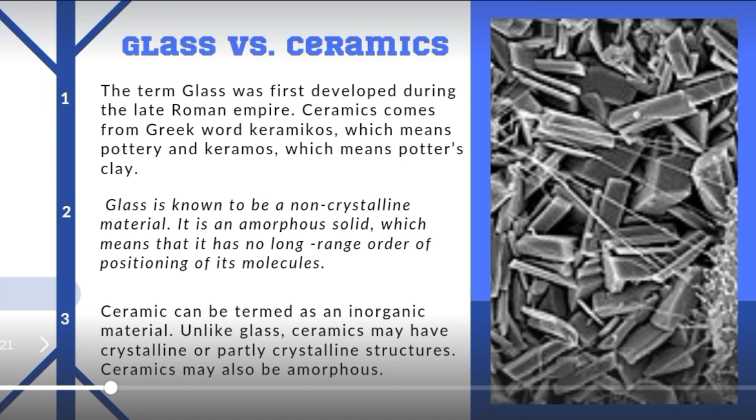Silicon dioxide is the main component of glass. Glass is a mixture of two or more kinds of metallic silicates. Clay is the main component in ceramics. Silicon dioxide, also known as silica.

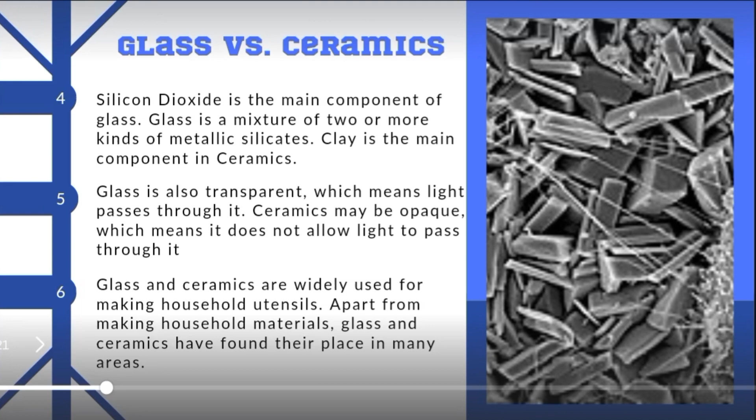How glass is made. So number one, raw materials. The first step in making glass is to gather the raw materials needed to make it. Main raw materials used in making glass are silica sand, soda ash, and limestone. These materials are usually gathered from natural sources such as beaches, quarries, or mines.

Once the raw materials have been gathered, they are typically transported to glass-making facilities where they are mixed together in a specific proportion to create the glass batch. The batch is then melted in a furnace and shaped into the desired form using various techniques such as blowing, molding, or pressing.

Mixing and melting. The raw materials are mixed together and heated in a furnace at very high temperatures, typically around 1700 degrees Celsius. In the mixing and melting stage of glass making, the raw materials are combined and heated in a furnace at extremely high temperature, resulting in a molten glass mixture. This result is created by combining silica sand, soda ash, and limestone. This high heat causes the raw materials to liquefy and fuse together, forming the basis of the glass that will be created.

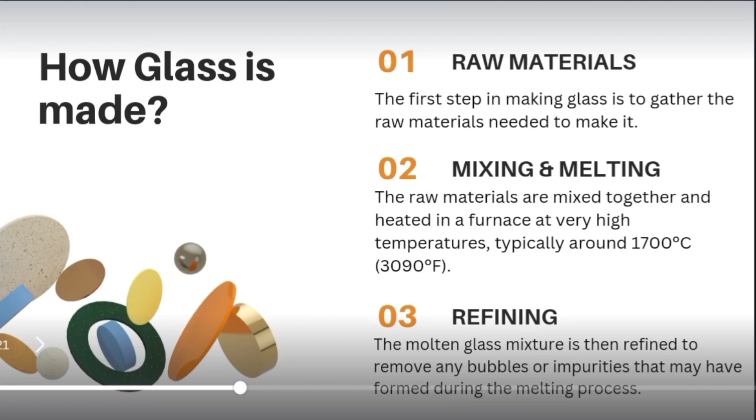The refining process involves stirring the molten glass mixture to break up any bubbles that may have formed, and then skimming off any impurities that rise to the surface. So, it helps to ensure that the final product is clear, uniform, and free of defects. Once the refining process is complete, the molten glass is ready to be formed into the desired shape and product.

How glass is made? Forming. The molten glass is then formed into the desired shape using one of several methods. So, blowing. In blowing, the glass is heated again and air is blown into it through a blowpipe or other tool to create a bubble. The bubble is then shaped and manipulated until it forms the desired shape.

So in pressing, the molten glass is poured into a mold and pressed into shape using a plunger. In casting, the molten glass is poured into a mold and left to cool and solidify into the desired shape. After forming, the glass product may go through additional processes such as annealing, cutting, and polishing to achieve the final product. So, annealing, once the glass has been formed, it is slowly cooled in a process called annealing.

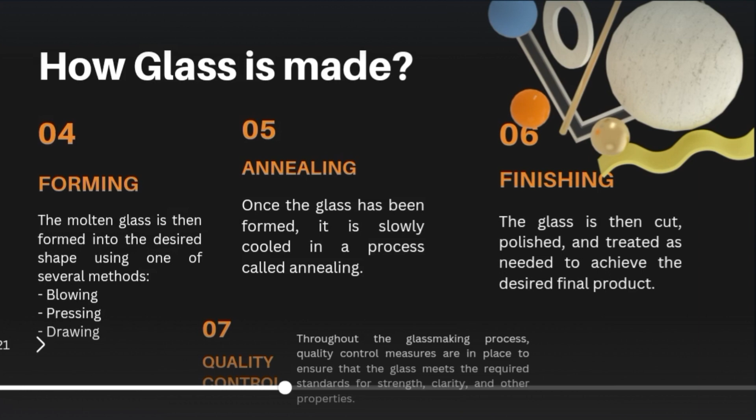So, quality control throughout the glass making process. Quality control measures are in place to ensure that the glass meets the required standard for strength, clarity, and other properties. Overall, the process of making glass is complex and requires skilled technicians, and advanced equipment to produce high quality glass products.

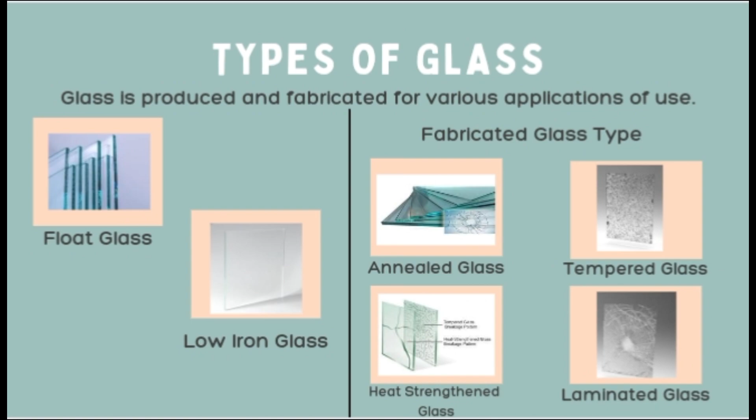Common ingredients to obtain glass. Sand. Sand, also known as silica or silicon dioxide, is one of the main ingredients used in making glass. To make glass, silica sand is mixed with other materials such as limestone, soda ash, and feldspar, which help to lower the melting point of the silica.

The mixture is then heated at high temperature in a furnace until it melts into a liquid state. The molten glass is then poured into a mold, where it is allowed to cool and solidify into the desired shape. The quality of the sand used in making glass is important, as impurities such as iron oxide can give the glass a greenish tint. To ensure high quality glass, the sand is often washed and purified before use.

Additionally, recycled glass, known as cullet, can also be added to the mixture to reduce the amount of virgin sand needed, making the glassmaking process more sustainable.

Next ingredient is soda ash. Soda ash, also known as sodium carbonate, is another important ingredient in the manufacturing of glass. It is usually added to the mixture of sand and other ingredients to lower the melting point of the silica and improve the flow of molten glass. Soda ash is obtained from naturally occurring deposits or can be produced synthetically by reacting sodium chloride, or salt, with limestone and carbon dioxide.

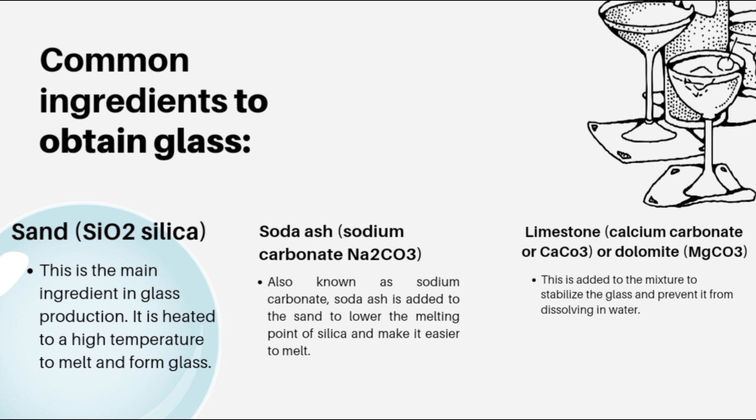The use of limestone also improves the chemical durability and strength of the glass. In addition to its use in the glass industry, limestone has a wide range of applications such as in construction, agriculture, and chemical industries. Main properties of glass.

First, transparency. Glass is transparent, which means that it allows light to pass through it, making it useful in applications such as windows, lenses, and optical fibers. One of the fundamental characteristics of glass is transparency. It refers to glass's capacity to let light through and allow objects to be seen through it, given that it allows a large portion of visible light to flow through it without noticeably distorting or being significantly absorbed.

Second is hardness. Glass hardness is yet another crucial characteristic. It speaks to glass's resilience to abrasions or scratches. Glass is a tough substance that is challenging to scratch or harm. Glass's chemical makeup and how it is handled during the manufacturing process affect how hard it is. Glass is a strong substance that can survive wear and tear over time due to its hardness.

Glass can still be scratched or damaged by hard or sharp items. Despite the fact that it's a durable material, glass can be given specialized coatings or laminates to boost its durability and hardness, which will help avoid scratches and damage.

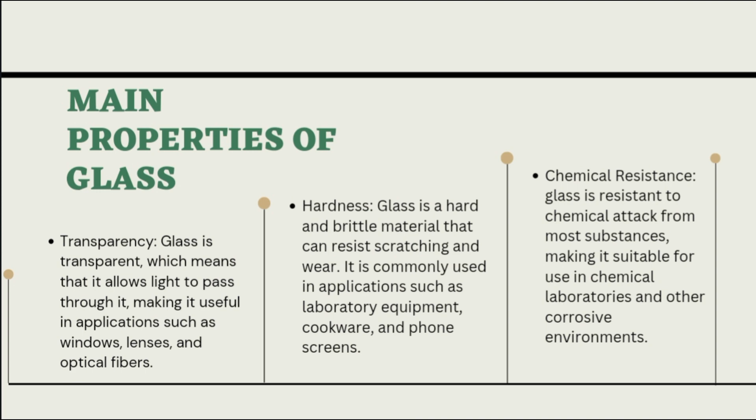Next is chemical resistance. Another crucial characteristic of glass is its capacity to withstand chemical attack from a variety of chemicals. Glass has a high degree of inertness, making it resistant to most chemical reactions. Strong chemical bonds between the atoms in the glass structure are responsible for this. It suits applications like laboratory glassware, chemical storage containers, and medical equipment.

Next is thermal resistance. Another crucial characteristic of glass is its resilience to heat. It describes glass's capacity to tolerate extreme temperatures without breaking, melting, or going through any other kind of physical or chemical change.

Next is durability. Glass durability is yet another crucial quality. Glass is a tough substance that can resist a lot of abuse. Due to its resistance to impact, abrasion, and scratching, it is perfect for usage in a wide range of industries, including consumer goods and building construction. Glass is durable because of its chemical resistance and toughness.

Next, and last, is electrical insulation. The electrical insulation of glass is the next significant characteristic. Glass is a superb electrical insulator, meaning that electricity does not conduct through it easily. Glass is the perfect material for electrical devices like insulators, capacitors, and transformers.

Because of its characteristic, glass has a high electrical resistance which prevents current from passing through it and lowers the risk of electrical shock while safeguarding the equipment.

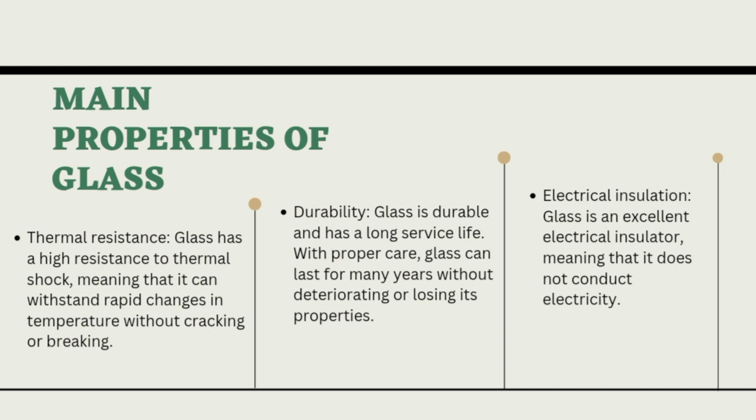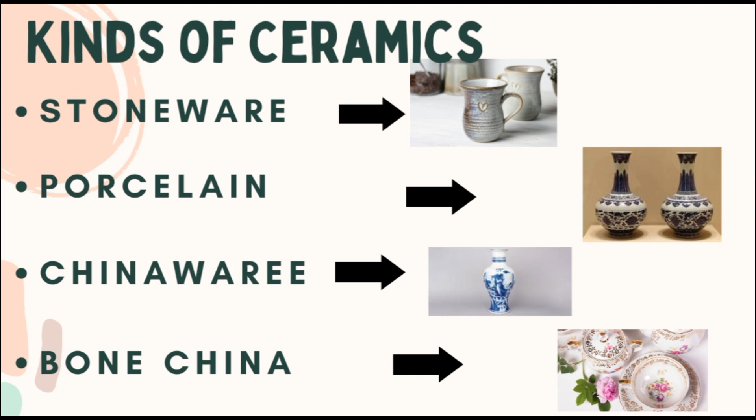Last is earthenware. It's a type of ceramic ware that is fired at a relatively low temperature, around 1000 to 1200 degrees Celsius. It is made from clay that is mixed with various minerals such as feldspar, quartz, and talc.

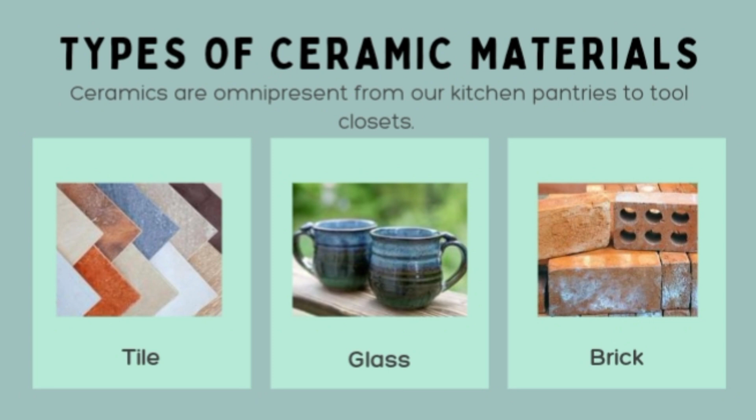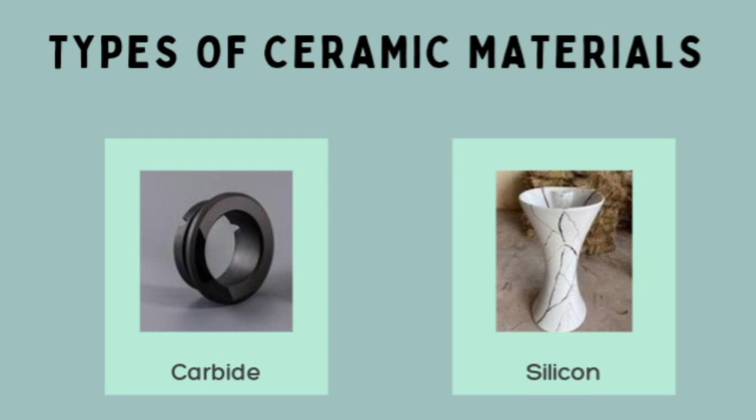The example number 5 is silicon carbide. Silicon carbide ceramic, known as SiC, is an advanced ceramic material containing silicon and carbon. It occurs in nature as the extremely rare mineral moissanite. Synthetic SiC powder has been mass-produced since 1893 for use as an abrasive.

The raw material procurement department is the most important segment of a manufacturing company. The major part of the production cost is the cost of the purchase of raw materials from the suppliers. It is an art to create a strategic plan for the purchase of materials for the production.

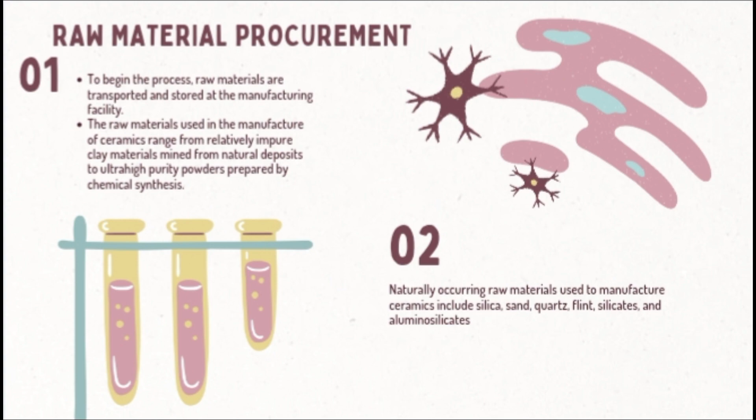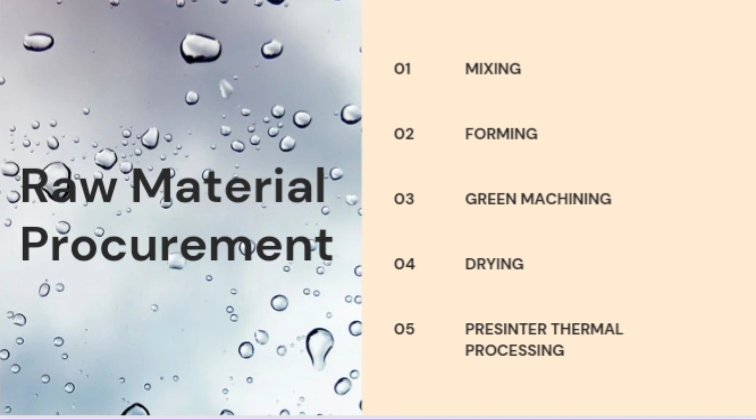And example number 5 is presinter thermal processing. Thermal processing is defined as the combination of temperature and time required to eliminate a desired number of microorganisms from a food or product.

Example number 6, glazing. The meaning of glazing is the act of furnishing or fitting with glass. For example, the business or work of a glazier; panes or sheets of glass set or made to be set in frames as in windows and doors. Example number 7, firing. The action of setting fire to something. Example, the deliberate firing of 600 oil wells.

Example number 8, final processing. Final processing means bone fragments and non-combustible items such as metal debris are separated by hand or by magnet. The bone fragments are placed into a cylindrical processor and further pulverized or crushed into small uniform fragments.